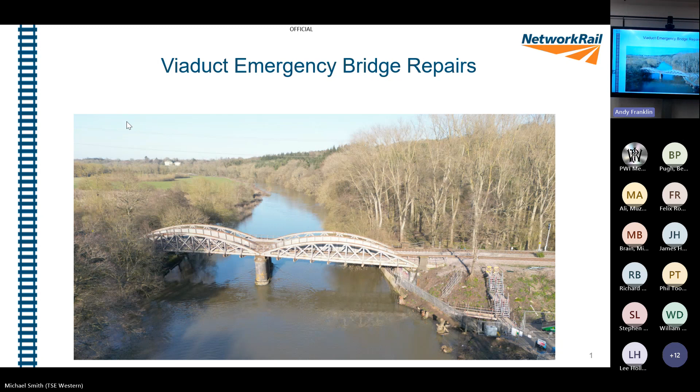It's not working. Oh, you can use your mouse, of course. Move the top screen. Now just click on that email select button. Click with your mouse. Click on the question. Top screen. Move the cursor around again with the mouse. Just click on that, and that should work. There you go. All right. No, I'll go with that one then.

So it's a bit of a why, who, where, what, and how. Why am I here? Because Andrew asked me to, and he didn't find any other candidates to talk about Nuneham, but Mr. Marshall, who's part of the PWI, is over there and knows as much about this scheme as I do. So thank you for that. A little bit about me, I'll come on to that in a bit, about who I am.

Most people will now know about Nuneham, but there were a lot of people who didn't. It's a small village in Middle England somewhere between Didcot and Oxford, and it probably impacted, let's be honest, nearly everybody in Western Route over the period it was shut. There were quite a lot of other people affected in numerous other routes as well, because of the diversions we had to invoke when we shut that down. So a huge amount of the travelling public was affected, and now know where that plays in.

On the asset, there was a bit of a sinking feeling that came about, and we'll talk about that. There's a little bit about the asset in terms of 'Trigger's old broom,' and you'll understand what I mean with respect to that. And then I guess the how: how do we put it all back together? And was that genius or luck? I'll let you fathom out whether you think one is more appropriate than the other.

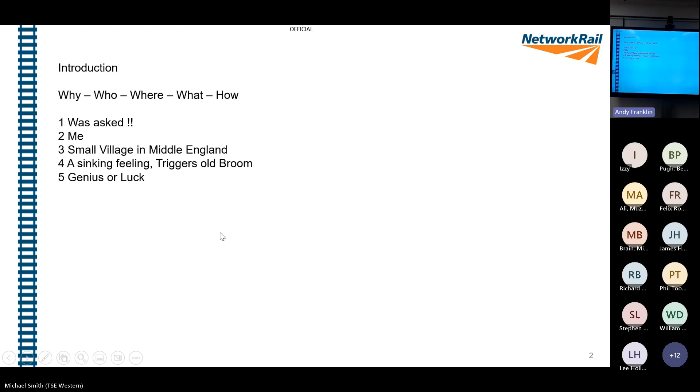A bit of the history on Nuneham. Originally constructed, top right-hand side, as an 1840s timber viaduct across the Thames and the floodplain that was there. Didn't last very long as a timber viaduct, which isn't unusual because we've got lots of timber viaducts in the West Country that didn't last very long either before they started to get rebuilt. Replaced with the metallic structure you see on the bottom left and bottom right in the 1850s, as a 2-span steel structure on steel trestles.

I'm going to say steel trestles, but I'm not absolutely certain. I think they were steel trestles down onto some form of foundations - and I say 'some form of foundation' because we're not absolutely certain what those went down onto. And if you can see in the bottom left-hand corner, there's just the outline of a bit of a wing wall, and that is what was there today.

Well, it's not there today, but it was what was there earlier in the year. Then in 1908 the river spans were effectively rebuilt with the two trusses you've seen in the original picture, which were still evident today. And in 1929 it was again modified, with the back spans over the land to the north side turned from some very simple metallic structures to something quite unusual: 1929 arches. Now most of the arches we put in date from the 1820s rather than the 1920s, but for whatever reason, they built four land spans with brick arches there.

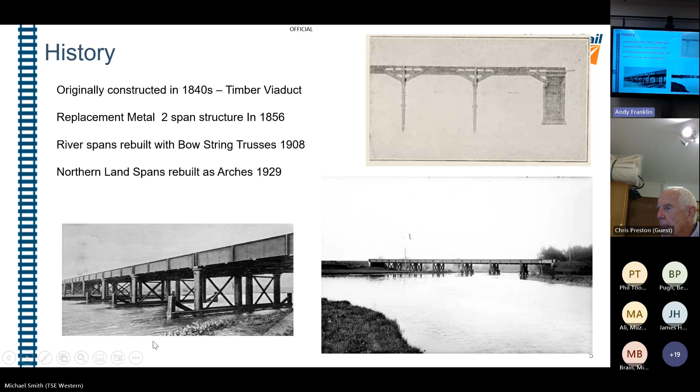So it was a bit of a Trigger's old broom. Was it a known problem child?

About 5 years ago they tended to be about a year apart, and we thought that was addressed by tamping, just bringing the track back up, and it effectively went away for another year. As we moved forward in the last 2 or 3 years they've been more regular, in terms of bump reports during the day, with all traffic on stop. From that, all traffic on stop, we've got lots of delay minutes, back out there with a bit of hand tamping, and being put back into service again.

But there's also evidence from about the last 10 years that something's been going on with that asset, because the depth of ballast on the south span is very much deeper than on the north span over the main river. So it's been accumulating ballast depth and interventions over quite a period of time.

When you look at the structure in its own right, the deck and the abutment, there are limited defects in it. It hasn't broken the back of the abutment, and the structural form, the steelwork, didn't twist or anything like that. So it all looked pretty stable and okay.

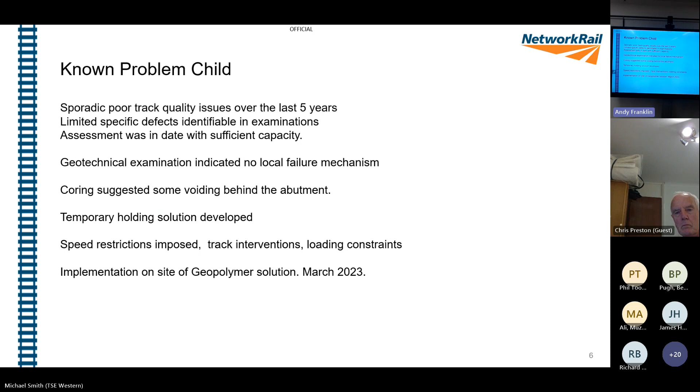We came to the closure point - what we call change of plan - because we'd gone from a temporary situation where we were just about holding things and allowing the network to run, to the point where we couldn't satisfy that anymore. You can see photographs of the track quality leading onto the structure, and in the centre picture you can see we're taking ballast away through the centre. It's taken with a distorted lens so it wasn't quite as bad up close, but in reality that's what the train is feeling as it runs into it.

How far did the end of the span drop? Around 550 to 600 mil from its original position - quite significant. That's over around 10 years we think that had occurred, and over the preceding weeks up to closing it dropped by about another 70 mil.

The picture on the left-hand side of the wing walls, up until around February this year, these look relatively intact. There was some minor damage on top of the brickwork, but in terms of these big fractures, they were relatively intact. The big fractures are because the abutment and the bit of wing wall attached to it was going down, while the original wing walls to the side were staying where they were. So the abutment was going down and ripping itself off the other parts of the wing wall, but this part was staying in plane - it stayed vertical, stayed intact. There was a crack in the middle but it wasn't shearing disproportionately, and everything remained in plane, so we thought we had the ability to continue taking the load.

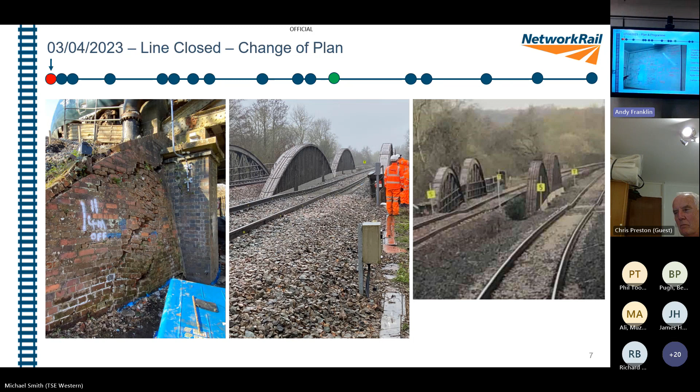We kind of knew there was a possibility of this, but didn't think we'd actually get to that point. So we had a position where we couldn't keep the track quality at 5 miles an hour. Also, putting the geopolymer in hadn't actually stabilised the vertical movement - you could have extrapolated from the graph whether we thought that was going to occur, but it still wasn't occurring.

Where everything had remained in verticality with the abutment, there were some signs the bottom of the abutment was starting to kick out. So we were now in a position where, whilst the deck had come down and the abutments had gone down, there was potentially an out-of-plane force starting to kick the abutment towards the river. All of those things meant we couldn't guarantee we could run a train over this anymore, and we stopped at that position.

I was on holiday. I then made a skedaddle back down to Swindon - I was actually up in North Wales, so it wasn't so far.

Then we had all the great and the good come down the next day, asking a series of meaningful questions about how we could keep the railway open, how we could modify the asset to keep it open, and any other way we could keep it running. But in reality, we didn't believe we could operate a safe asset there. We also didn't fully understand the safety of the asset in terms of it staying vertical, staying supporting the structure, and not ending up in the river.

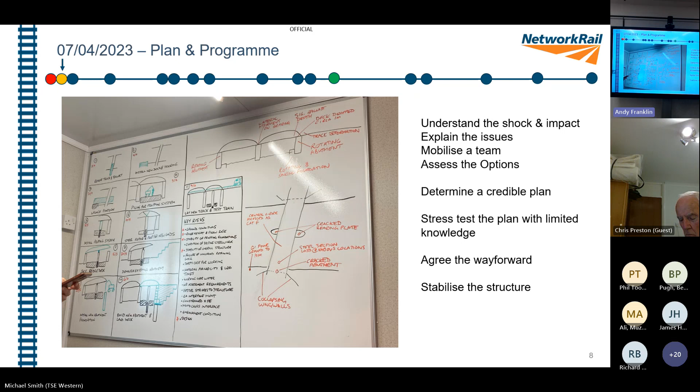So we set about taking the track out, removing the dead load, with machines taking out the panels. They had to transit over the bridge, so we had concerns there that we're transiting on a bridge we knew was not in a good position and had failed.

A little bit of safeguarding though - the day before or a couple of days before, we were running 100-ton freight wagons over it. So putting some of the rail vehicles on may be okay, but we still had to assess that, think about it, and develop methodologies so it's safe.

This was because the deck had just been going down, and every time it went down, the ballast level had been cranked up to create a running surface. So we had 2 big vacuum machines down on the land by the river with hoses that came up, and we vacuumed that off.

A lot of the ballast at the bottom was still impacted in the bitumen on the deck plate, but we got a lot of the load off. Taking the load off, the abutment no longer settled. So stopping the trains and removing that load gave us some stability in the abutment - it was no longer sinking.

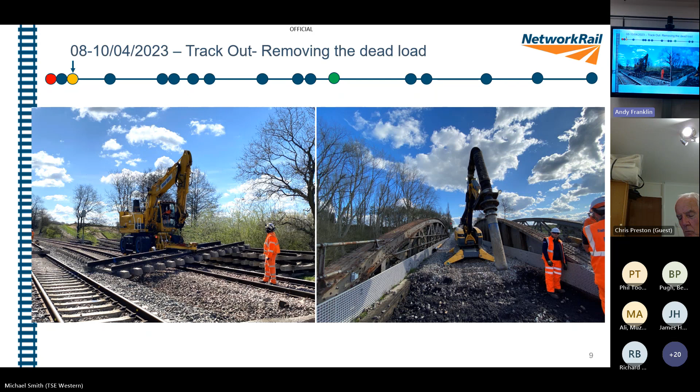By taking that load off, one of the things we had to do was effectively just hold that deck up, because we knew we had to have a second means of holding the deck up since we were going to work on the abutment. So removing that load reduced the requirements of whatever temporary works we needed to hold the deck up.

To hold the deck up, it would have been nice to have a good bit of ground to build a new abutment or something permanent that could take heavy load, but the only thing in front of the abutment was the river. So we were now in a situation trying to work over the water, which needed some specialist equipment. We've been fortunate that Tymor Marine Services, who did a lot of work down in the Dawlish works for us and other river works, could get them on board fairly quickly.

They had access to quite a few bits of kit in terms of pontoons, boats, and the walkway pontoon, segmental pontoons that you can see there, but they also had some larger weight stuff that we could bring equipment onto. We got agreement from the EA that we could close one of the spans down from a navigation perspective. The other one had to be left open.

Over the first couple of days, we had very high flows through there because this was in April 23. We had very high flows through the river, and the river went up and down by about 300 or 400 mil as well. So we were trying to work with understanding how we could actually mobilise in and around that area with fairly high flow rates through it.

The solution starting to take shape was that we had to put some form of foundation in the river. Initially, we were looking at doing a load of screw piles in there and trying to take the load into the ground through screw piles. Screw piles are easy to access, easy to put into the ground, but their actual physical load capacity - because in reality the screw pile in the ground is okay, but the tube that comes out of it was the weak point in all of this.

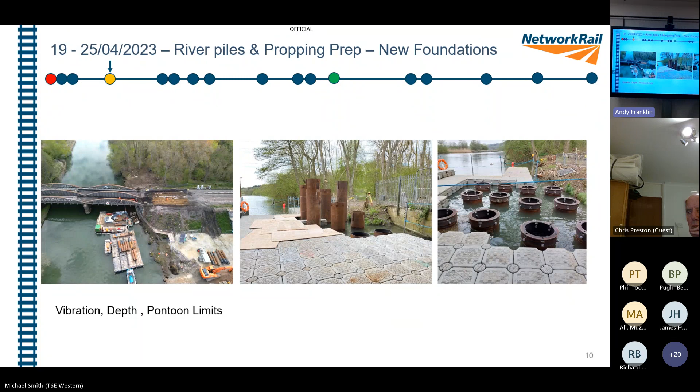So either side of the deck is where we then put these cluster of piles being driven in. Piles were then prepared with a pile cap, which you can see here, to be able to take the next part of that, which is effectively the framing devices that would then span underneath the bridge. So we then got the pile caps with a collection beam on the top of that, and the same over the other side.

In order to be able to manoeuvre the Mabey system, which came as a kit part, so this all came on relatively small wagons, built up as a series of kits of parts, down in the compound, and then swung around out onto a barge underneath the bridge, and then it needed to be lifted and cradled onto the pile caps that you can see there.

I think that's the best part of a 1,000-ton crane, and we were trying to put it on part of a floodplain. So the amount of preparation work - every time we started to get bigger kit, we ended up doing more and more preparation work to be able to make certain that we could actually keep that thing level on the ground.

So the amount of stone that we brought in, all these bog mats that came in - for every step forward you're coming up with a solution, you were coming up with 3 steps behind it that you had to do more and more prep work to be able to get that solution moved into site. So a huge amount of materials were then starting to come down.

That crane cost us around about 150k just for the mobilisation of this part of the elements of the work, and you'll see a picture later. We had to come back and use it again, so some significant cost.

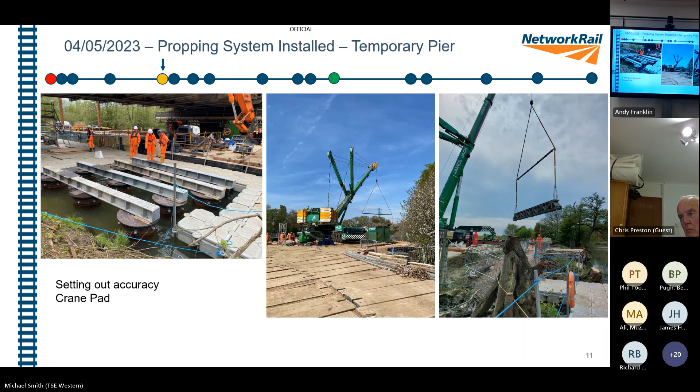From here, you can see the systems in place underneath the end of the deck. We've got some props that have gone in, and then it's jacked up. In the final position, you can see the deck is actually disconnected now from the original abutment and being brought up into a coplanar position, the same plane as the original was, and that's around about where the lift of 600 mil is. So there wasn't any breaking down of the abutment there; it's effectively just resetting it back to where it was.

Talked about beams being within the limits, and they deflected around about 70 mil downwards. When we were jacking them up, they were still going down, but effectively they stabilised and lifted the deck.

The loading points of the jacks onto the structure were relatively okay because we managed to lock them onto the cross girders, which had a fair bit of capacity into them, which then went straight into the truss.

A little bit of modification needed to be done on the central girder, just because where the jacks were going to go wasn't where some of the stiffeners were. So we could have just ended up crushing the bottom of it, but we did some modification on that.

The bearings on the original structure didn't come away the first time they were jacked. They were still trying to lock themselves in, so we were over jacking it at one point, but a little bit of a jackhammer sorted that out.

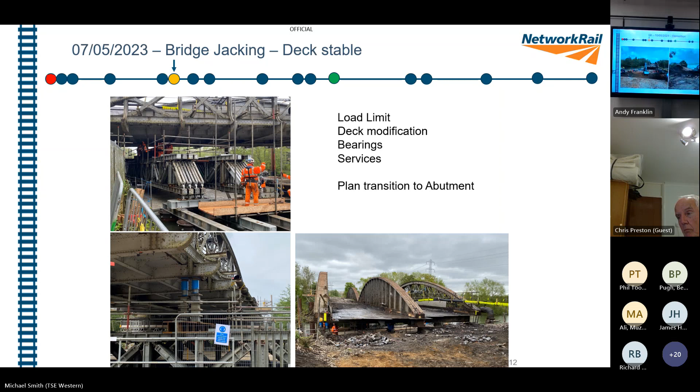The pictures show some of the demolition of the abutment. Easy enough to get relatively lightweight machines in there and start taking down the brickwork abutment that was holding the original asset up.

You can see we've got it down to ground level, as effectively this is almost at river level, the bottom of foundations. We can't actually confirm what the foundation type was for the original abutment. We got some evidence that there were some timber piles in here, because when we were excavating, we snapped off the top of those and drew a couple out, which were in relatively good condition, the ones that we could get to and see.

When it came to the permanent solution, we went down through that foundation area but didn't encounter a lot of resistance. So when I talked about the 1856 structure being on timber piles, the steel structure was probably modified onto those timber piles, and the 1908 structure was probably modified onto them too. So we've effectively got larger and larger deck spans, higher and higher weight, being added onto something that was never envisaged - just timber piles driven into the alluvium, probably to a set. After a period of time, for whatever reasons, we've overloaded that, and it's got to the stage where it's given up.

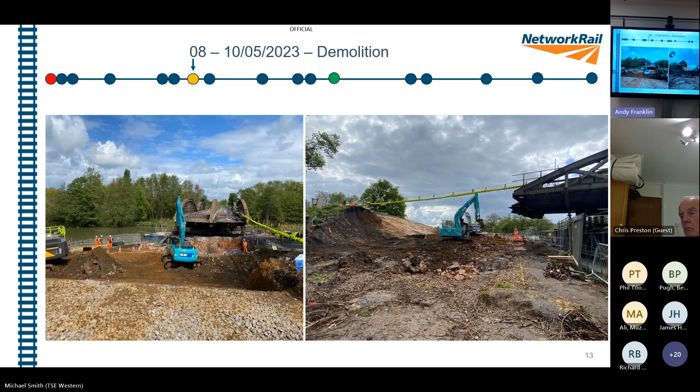Now we're into the permanent works, and you can see the size of the compound that started to develop down here, and all the bog mats that are in place, and all of the piling platforms.

Piles that we drove in were around about 15 to 18 metres for the permanents - fairly long, and we had driving in segments. The piling rigs you can see on the right hand side had to limbo underneath and be able to then put themselves up. And of course, they're a lot heavier than any of the ground we found in this area, so again, a huge amount of preparation to actually put the bog mats down. There were 3 or 4 metres of material in between before we'd even get close to having confidence that those piling rigs wouldn't actually turn over.

One of the original designs suggested that we were going to put a new abutment behind the original one and therefore have some form of cantilever out to hold the original deck up. Not my choice of design at all, because of the way it would work with cantilevers and everything being in tension.

99% of the time. So we were then in a position where we were trying to look at using the existing shadow of the abutment and trying to put something down. But the problem was that the trusses come out, that's where the bearings are, so we couldn't use that space because you can't get underneath the bearings with the headroom we had. In reality, we had a series of piles that sat in between the trusses - two piles on the outside, effectively a four set of piles holding the centre load, which got twice as much weight because it's got half the deck on each side, and another set of two piles holding outside of the upstream truss.

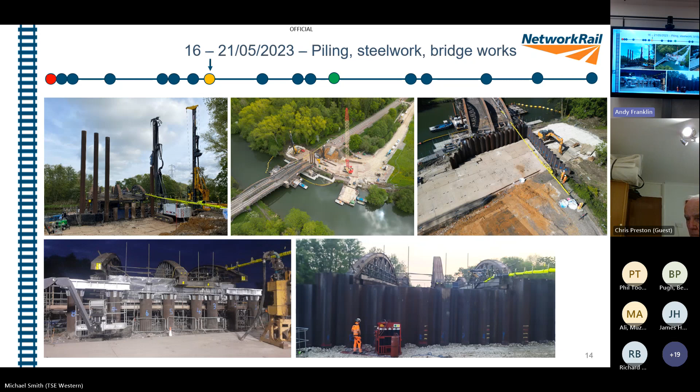Bringing in the backfill, you can see that there were some big rollers that we used when we had the headroom to do it. As we started to get into position coming up towards where the cables are, the headroom for the big rollers couldn't be accommodated. We had to switch to smaller rollers, and then whacker plates, to get underneath this area as well.

So all this time, the cable route was actually a problem in terms of transmitting material into where we needed to. Compaction was also a problem because we're working in that space. Although, having said that, two-thirds of the area we could reasonably easily access from the river compound. It was brought up in 100mm layers, continuously tamped, and we were doing density tests on that.

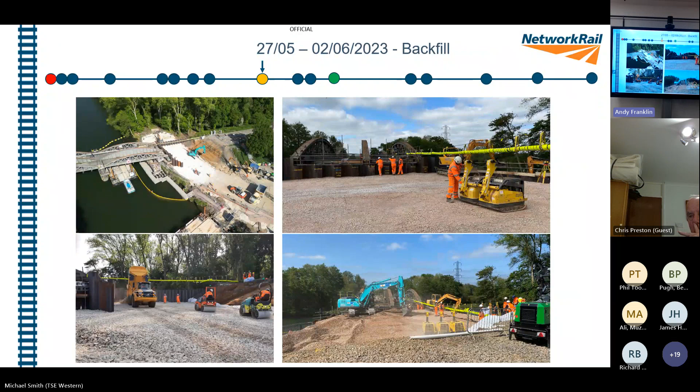So if that bit ever fails again, Mr Bartlett, I will be extremely surprised. This bit just about here will probably go, but that bit there ain't going anywhere. Properly engineered. Yeah, it can't, I can guarantee it can't go anywhere. It used to be called belt and braces.

So this is coming up towards the end, where you can see modified new steelwork on the end of the original deck plate that we cut out. The line of the new piles is through here. This is where I mean about these box piles holding back the abutment.

Very useful things to get hold of, and they were nicked off HS2. HS2 had a series of them in a compound where they weren't using them, so we borrowed them. This was all a case of needing material we could get our hands on very quickly, and solutions around understanding where those materials were and whether they did what we needed them to do. Because you can finesse some of this design, but every time we were finessing it, we were losing days.

Yeah, so most all of this is very robust. Still dead, still in a grotty condition, and it's still grotty now, but we've got bits of new steelwork on it. This is what I mean about Trigger's broom.

So there's two issues to that. Trigger's broom in terms of modification to the original asset over its period of time, 1840s, 1850s, 1908, 1929. But we've also got parts of new steelwork on old steelwork, to modern standards compared to old standards, to RA capabilities compared to Euro codes, and all of those design issues that come into being.

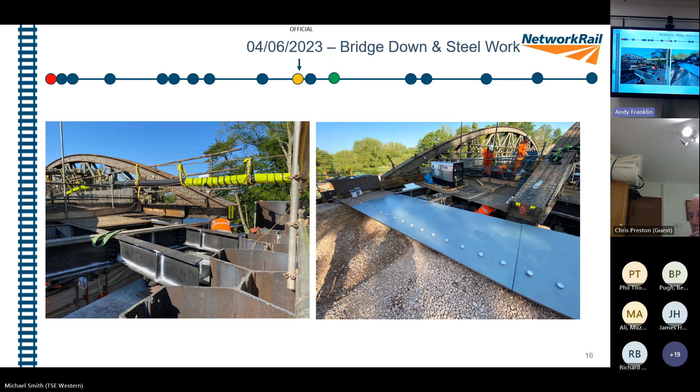And then you've got some geotextile, geocell going in, which allows for the transition to work. As I say, you've got a fairly hard transition in there. P-way being brought back up, and your PW, P-way stuff going in. Don't ask me what sleepers they are - I have no idea. But I can tell you all the nuances of the structure itself.

Most of that was relatively new stuff that was coming in, because I don't think we reused some of it. We had logistics that we were coming in and being serviced to the top yard and being brought down.

The McCullochs were nicked off a job up in Scotland, so I think they had a 2-day delay on some program up there. So we were impacting other parts of the network in terms of nicking their plant to be able to put stuff back together again.

Troughing routes going in for putting the cables back in for the fibre optics.

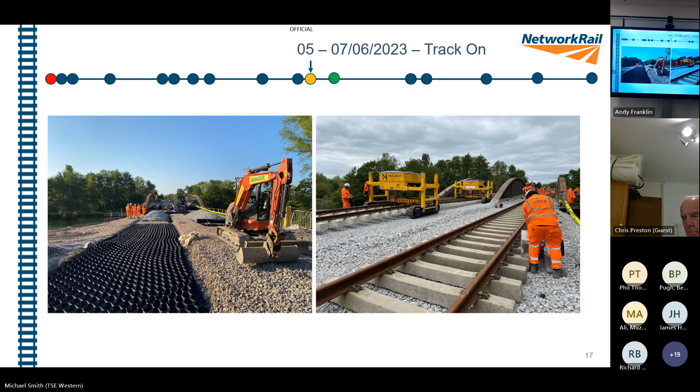And then we have the effectively decent P-way that's back in, and the first train that ran. That ran on the Thursday morning of the 8th. So we effectively handed it back to the route on 1900 on the 7th, which is the Wednesday.

The intention was to hand it back on the Friday. On Thursday morning, we managed to, with GWR's assistance, roster one of their trains that went up and down, did a proving run through it, and therefore we handed back to the route early doors on the 8th, and then service resumed. Majority of service resumed on the 9th, which is the day we handed it back.

We missed an opportunity, or constrained ourselves with an opportunity, in order to give something like this back after you've had a 9-day closure. The route needed at least 4 days notice of when they could run their first train. We were still bringing up the embankment 4 days previously. We had no real surety that we could have done all of the P-way testing, all the signalling testing, and everything else that was going on. So we couldn't give that 4 days notice.

And hence we weren't able to run a full recovery service on the 9th. But we gave it back to the route.

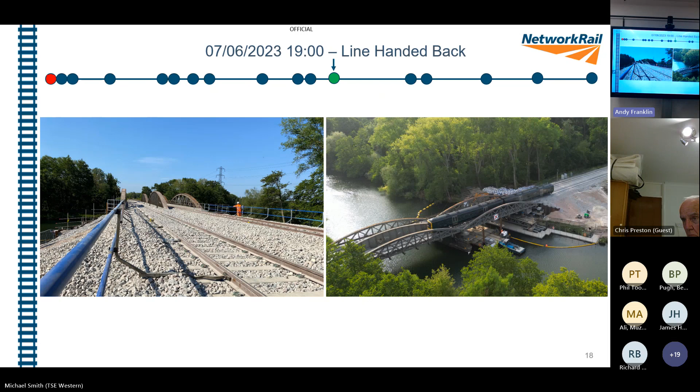Which certainly looks a lot happier now, doesn't it? Yes. We had to bring back the big crane again, because we had to move these things back off their temporary support, back into the river, take them back out again and off-hire them.

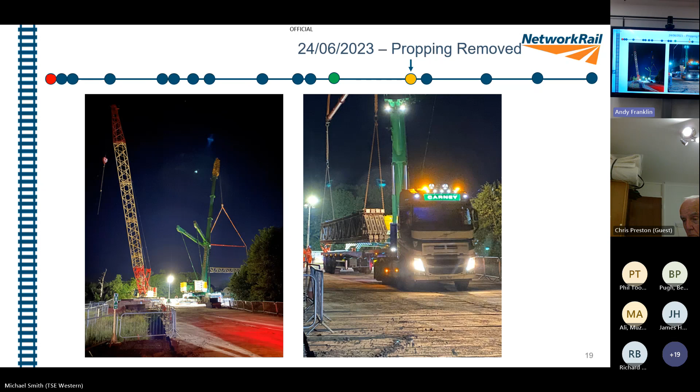So a couple of weeks later, we were in that position of demobilising. And we had to demobilise all of the compound area down here with all the temporary works and give that back to the EA. The haul road had gone up and down quite a few times.

The compound, which started off as around about 3 cabins, then grew to a city. And from that city then grew a huge spoil heap where all old materials going in and new materials going out. We had access ways over the fields for about a mile down here to go out.

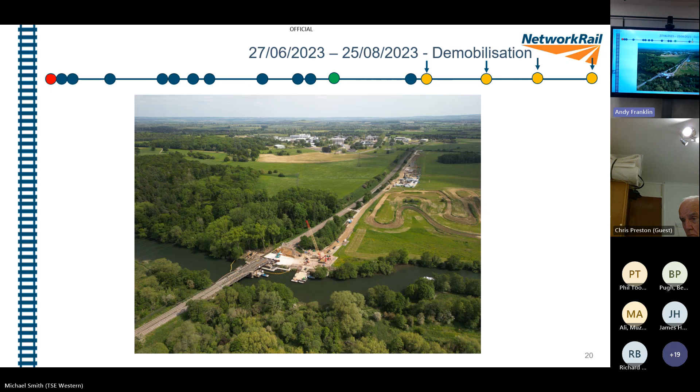Why did it work? Well, I think it did work. The team were already partially mobilised, so we knew who we were dealing with. The constructor had the experience of complex works and could bring that to the table, rather than actually using the wrong contractor. That meant they also had access to the kit as well - access to wider parts of the business that could call on that quite quickly.

We had very much the top level team of those contractors coming down and were effectively asked, is there anything you need from us? And apart from an open checkbook, they said no. In which case, can you make sure that you give us every opportunity to get this over the line? So they called in lots of favours across their higher level business and made that a clear focus.

We acted as a single team and it was small and compact. If you consider the amount of people that were on from Network Rail, there were 3 primary individuals - myself, Phil and Claudia Phillips. The Balfour team had 3 or 4 people at high level that sat there nearly all of the time that we were shut for 9 weeks. We had 2 or 3 design people that we interfaced with. And from that little core team, where everybody was on the same page nearly all of the time, that was where the dissemination of information came from.

We separated out the activities and the skill set, so I didn't start dealing with any of the project management stuff, and Claudia, who's the project manager for Network Rail, didn't deal with any of the technical stuff. So we left ourselves to deal with what we needed to do. We kept each other informed about where the risks were, but we separated ourselves out from that.

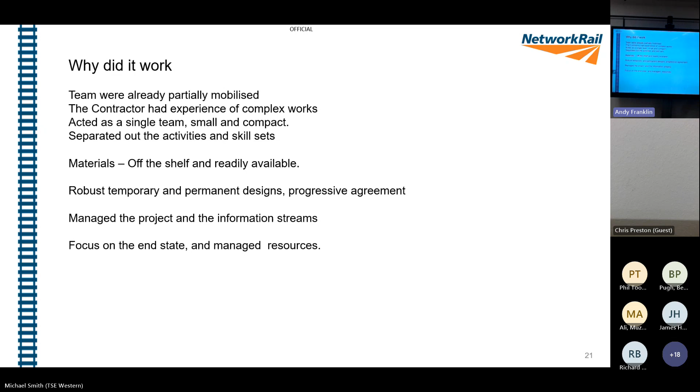The key thing for me was that everybody had to focus on the end state. And we actually, even within that, we managed resources. So the Balfour Beatty's contracts manager actually on 2 occasions had weekends away - one of them we went to Magaluf and got absolutely hammered on the stag do and came back, and then there's another one where it was his wife's 40th or whatever, and he went away somewhere else. We had the ability within the resources that we didn't burn ourselves out. If it had been more than 9 weeks, I think we would have struggled. But as it was, we got to the end state that everybody was focused on it. So from my perspective, those are some of the reasons why it worked.

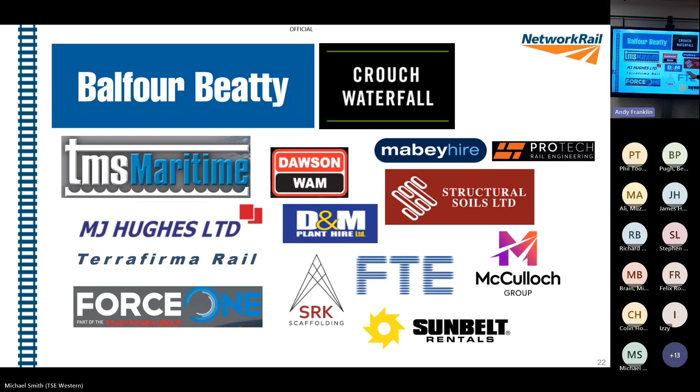Some of the players in that: Balfour Beatty was the principal contractor, Crouch Waterfall the main designer. TMS Maritime did all of the works in the river. Dawson provided most of the steel work, Mabey Hire, Protech. Structural Soils - we were limited in ground information, so we had to call them in very, very quickly to confirm all the ground information to get the pile design to work. MJ Hughes did most of all the steelwork fabrication and dealing with all that. Force One did some of the vacuuming of the ballast and the likes of that and Sunbelt and McCulloch. Without any of those, we would have really, really struggled, because everybody was working to the same program, everybody working to the same mentality, and each of those cogs all fitted together seamlessly. So really very fortunate in that. And that's Nuneham Viaduct for you in a nutshell.

Right, I'm sure there's some more questions. Is there any questions online? No, not on that. Right, nice - there's a lot of people online. I'll throw it open to the room now.

What do you think initiated the final series of failure? Because they've been there a long time before it suddenly - I can see why the rate of sinking would accelerate because there was more ballast going on. We were putting more ballast on, so we were exacerbating the situation - every time we had a minor fault, we were actually making it worse.

What do you think triggered that though? I still don't know why, and even when we were going through the loss adjuster, they said if you can prove to me it was an environmental issue, then I can give you some money. If you can't do that, then in some respect it's a settlement issue, which is within our internal insurance. So we didn't get any money, but we couldn't find what the trigger was. Now you could say we got more loading on it - no, we've only got container traffic on it realistically. We had lots of aggregates on it once upon a time, but we haven't got now.

We had all the coal traffic going to Didcot 15 years ago that was hammering hell out of it. Whether that started it, we don't know, but there's no one thing. There was a water pipe on the upstream side that burst - that was a water feed for Thames Water, happened about 6 years ago. Did that actually increase moisture levels at lower level and trigger something? But we couldn't find an independent activity that we could say is what started it.